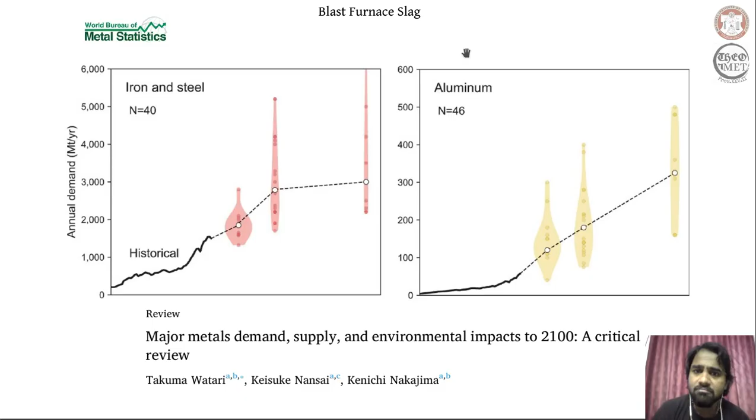So how useful should it have to be for it to be sold for a price? What potential should this blast furnace slag hold for it to be sold in the market? And that is exactly what we are going to discuss not only in this session but also in the sessions to come.

Now, one rather cult-like example that we can give for steel is that in one discussion, Elon Musk talks about why he chooses to use a form of steel, that is stainless steel, in his rockets. Often when we talk about aerospace applications, our mind directly goes to lightweight materials. We talk in terms of aluminum alloys, and if you want a more engineered form of a material, we talk about composites. But here you can see Elon Musk in this interview discusses why he uses stainless steel.

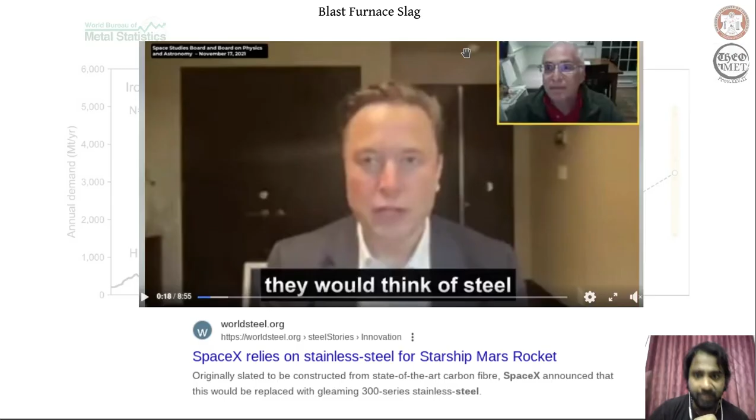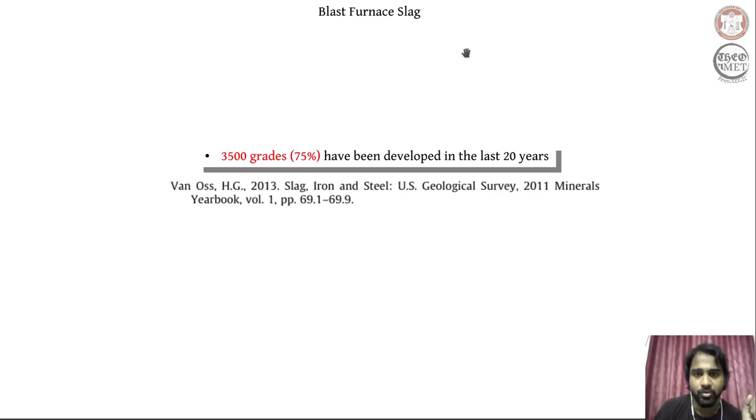So it means that in applications which are often associated with lightweight materials, the use of steel is also prevalent, and that is something that we will see in the days to come. And for that reason and similar other reasons, in the last 20 years there have been 3500 grades of steel that have been developed, and that means that we have identified specific applications wherein these steels can be put to use.

And that is the reason primarily why, because of these generations of steels, because of these productions of steel and the associated production of its waste, the slag, several associations have been constituted in order to manage the slag that is produced along with the manufacturing of steels.

So in the days to come and also in the days behind us, we have been using a significant amount of steel. We are engineering significant grades of steels, so they have contributed enormously to the amount of slag that has been generated.

So in order to manage them efficiently, several associations have been formed. So you have, of course, the US Association, Euro Association, and Australian associations, and soon hopefully we will also have an association of our own. Possibly you guys can come up with one. So all these are constituted primarily to manage this slag.

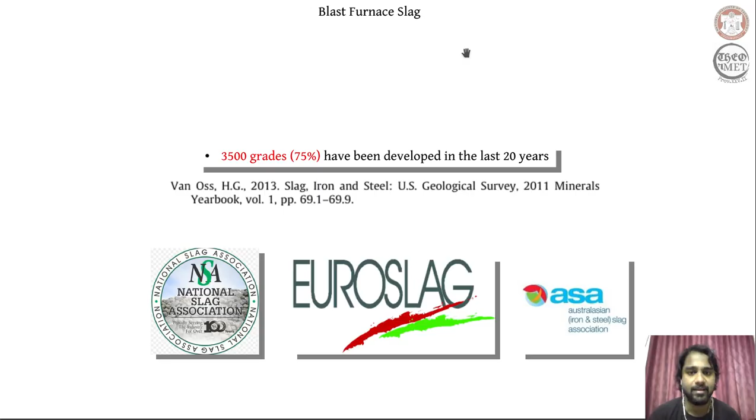Just a quick review of how this slag is produced. So this is primarily a waste that is generated during the extraction of iron. Now iron is available on the surface of the earth in the form of a mineral, and this mineral is nothing but a compound. So if I want to extract iron out of this compound, I have to break this compound down and I have to separate the impurities from the iron.

Now in order to reduce, both technically and also in a colloquial way, this mineral, this compound, into iron, I use an agent in the form of coke, and this coke ensures that my mineral, which is a compound, gets reduced into iron that is desirable to us. Once this impurity is separated, we want to separate out this impurity from the iron that we get at the end of the blast furnace operation.

Now for that purpose we use flux. So the coke that we use separates the impurity from the iron. Of course I don't want to get into the specifics of it, this is not the appropriate place for it, but I want to give you an overview. So I have my ore of iron in the form of a compound. I want to separate the impurities from the iron, so I use coke and I use flux in order to ensure that these separated impurities form a consolidated slag that can be separated out.

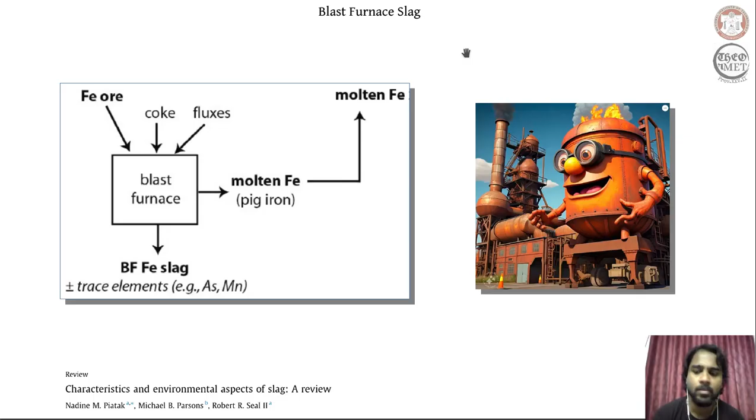So these components essentially constitute the slag; depending on the ore from which we extract our iron, the composition may vary, but these are the primary components of our slag. And understanding the chemical composition of the slag is the first step to ascertain how we are going to manage our waste products. So now we have an overview of the composition of the slag that we are going to manage.

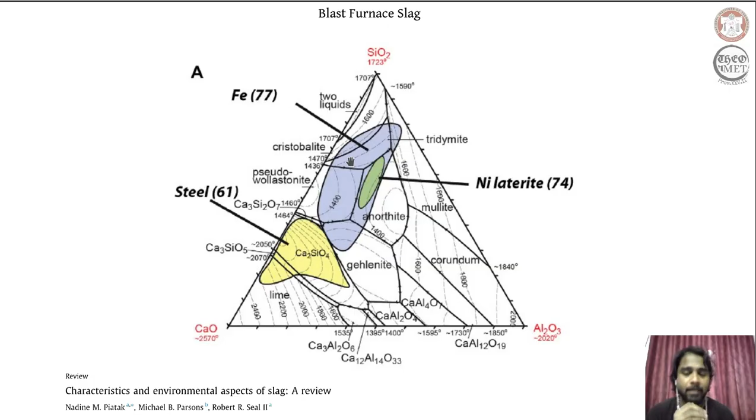Now, this particular paper here is often cited as a source for stating that the slag generated from a blast furnace operation is a non-hazardous waste. So of course there are two reasons why it is referred to as non-hazardous waste. You have a technically rigorous work reported in this article, based on which it is often stated that the slag, the byproduct that comes out of the blast furnace operation, is non-hazardous.

And one other reason is, if you consider the clay that we can find essentially on the surface of the earth, it is nothing but an alumino-silicate mineral. The clay in itself is an alumino-silicate mineral, meaning the sand that we see, that we walk on, has a composition similar to that of our slag. So based on these, it is claimed, to a certain degree of accuracy, that the iron slag is a non-hazardous waste.

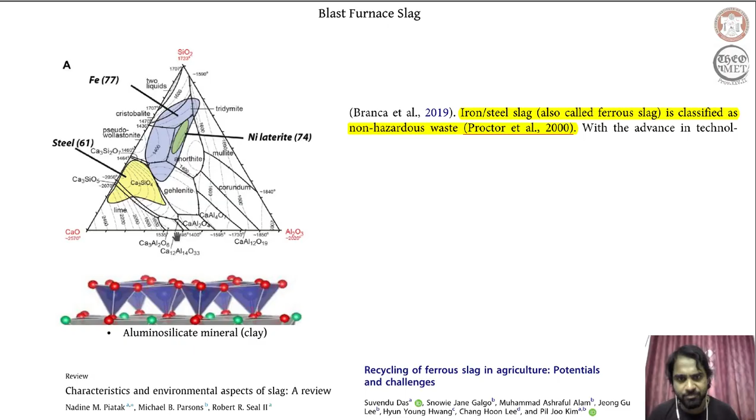The reason we have to point this out is primarily because had they been a completely non-hazardous waste, we wouldn't have to consider how to manage them. If they are non-hazardous, they are not going to harm the environment or us. We don't have to exclusively study their management techniques. All we have to do is just scatter them around the surface of the earth. But unfortunately, only some of these wastes generated in some of these plants, because of the nature of the mineral they are handling, are non-hazardous. And there are hazardous forms of slags that get generated during the blast furnace operation.

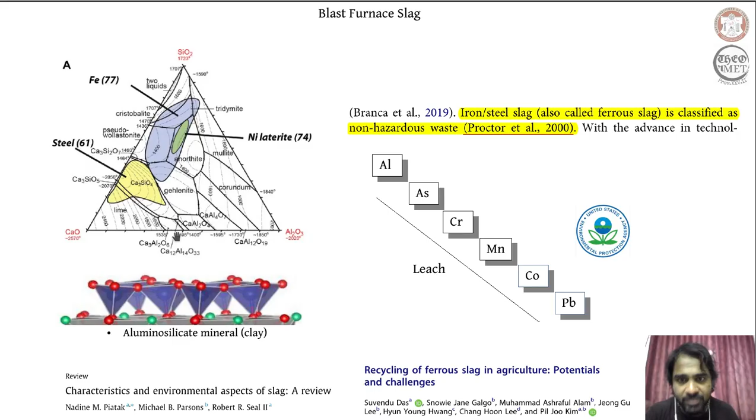The hazardous nature of these blast furnace slags essentially comes from the possibility of heavy metal ions getting leached out of these slags. So what we mean by that is, if I take this understanding of our slag being non-hazardous and keep scattering it on the surface of the earth, it is possible that during some season, the heavy metal ions, when exposed to atmospheric conditions, can get leached from the slag and get mixed up with water bodies, ultimately contaminating the water that surrounds us. So this is something we need to avoid and somehow prevent, and this can only be prevented if we properly manage our blast furnace slag. And for this reason alone, we cannot categorize all blast furnace slag as non-hazardous waste.

We have to look for the possibility of leaching these heavy metal ions. As you can see, some of these heavy metal ions are harmful to us and also to the environment, the plant and animal ecosystem that surrounds us. Some of these elements might not be so harmful at trace levels, but if their amount increases, they are ultimately going to be harmful to us. So before we decide how to manage the blast furnace slag, we need to determine how much potential there is for these heavy metal ions to get leached and dispersed into the environment.

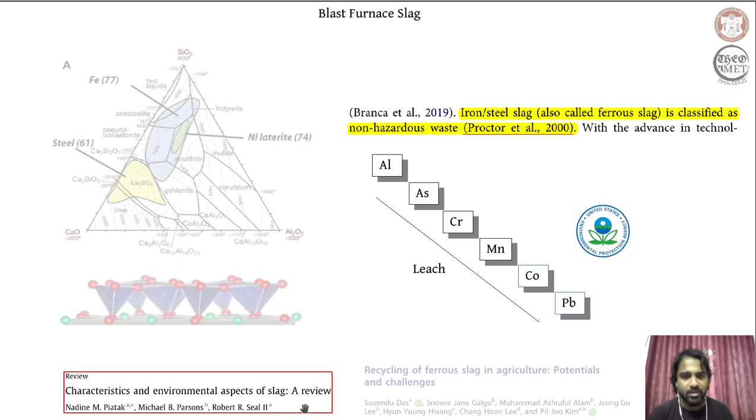So there is this wonderful work being highlighted here. If you are interested in understanding how we can measure the possibility of heavy metal ions getting leached from blast furnace slag, I encourage you to look into this paper. They talk about different ways you can study your blast furnace slag, and you can come to an understanding of whether the blast furnace slag you are considering, maybe from your own or a neighboring blast furnace operation, has a potential of leaching or not. You can get an understanding of the test measures that need to be undertaken. All that information is available in this manuscript.

It's just a shout out to them. In this manuscript, you will see all the nitty-gritty descriptions of what experiments to perform in order to understand if the slag I'm operating with has the potential of leaching these heavy metal ions or letting them out into the environment.

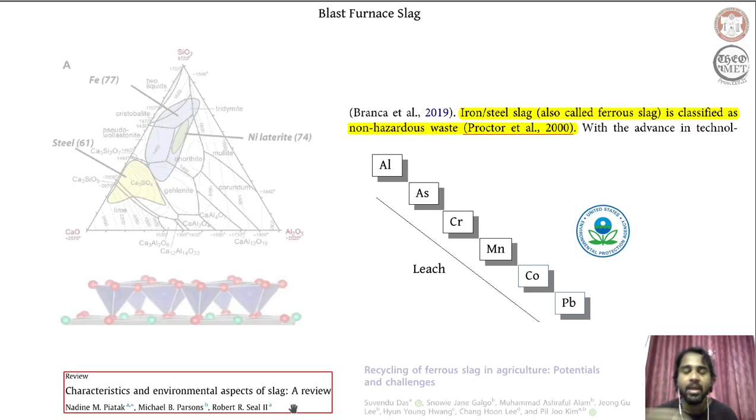Now, apart from the chemical composition and the potential of leaching these heavy metal ions, when we consider the wastes generated from metallurgical operations, we generally categorize them in an approximate way.

We categorize them into acid forming, acid neutralizing, and neutral ones. So what we essentially have in this case is something called acid forming, something called non-acid forming, and at the other end of the spectrum we have acid neutralizing. So blast furnace slags are in general acid neutralizing agents. Acid forming is when exposed to the environment they tend to form acid, and acid neutralizing is they tend to rather neutralize this particular operation of acid forming.

Because of their chemical composition, because they have a significant amount of calcium carbonate and calcium oxide, through these reactions they are able to counteract the acid formation. So meaning, if you have a lower pH using blast furnace slag alone, you will be able to bring up the amount of pH in the system wherein you are using your blast furnace slag.

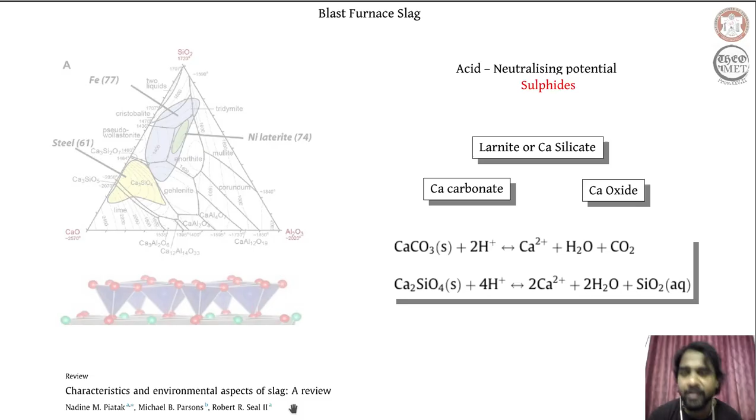Now, of course, some amount of sulfides might be present in your blast furnace slag. Sulfide is a well-known acid forming agent, but fortunately for us, this amount of sulfide is present in trace amounts. So the acid neutralizing potential of the blast furnace slag is able to overcome the amount of sulfide present in the system. Therefore, the entire blast furnace slag is acid neutralizing in nature.

So essentially we have a blast furnace slag that has three primary components: silica, calcium oxide and alumina, and it might have the potential for releasing heavy metal ions under certain conditions. We have test methods to ascertain them, and generally our blast furnace slag is acid neutralizing in nature. So this essentially talks about the chemical nature of the blast furnace slag which we want to manage. The entire series of these sessions is to manage the blast furnace slag.

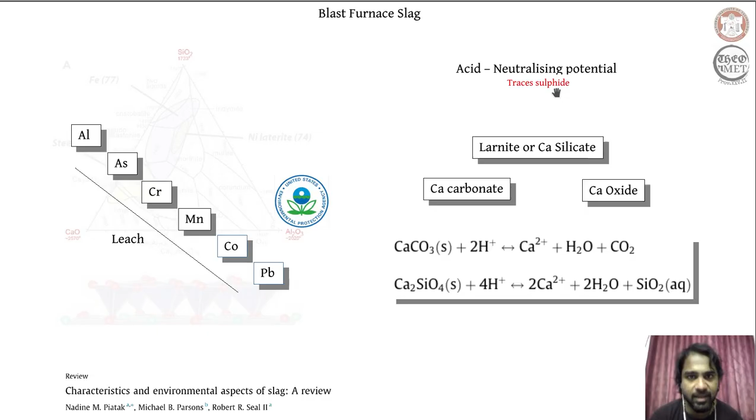Now, apart from the chemical nature, we want to also understand the physical nature, the mechanical nature of the blast furnace slag if we want to manage them. If you want to efficiently manage them, we want to put them into good use. So if you want to do that, we also want to understand the mechanical nature of the blast furnace slag. The mechanical nature of the blast furnace slag essentially depends on the way we cool them.

During the blast furnace operation, when the iron is getting extracted, we receive the slag in the molten state. So depending on how we cool this molten blast furnace slag, the arrangement of the molecules that constitute the slag varies. Correspondingly, the mechanical behavior of the blast furnace slag varies. So depending on how we cool them, we have different forms of blast furnace slag, and that is the reason why when we sell them we specifically state that the slag is a granulated slag. It means the slag is cooled by spraying water on them.

So we have different ways of cooling them. Depending on which way you adopt, you're going to have a different crystal structure, and that is going to give us different properties. And depending on the different mechanical properties, you essentially will have different applications, different areas wherein these blast furnace slags can be employed.

Now, to start with, or let's do one thing. Given that this is going to be a series of sessions, we will break it down into sessions of less than 20 minutes to make these contents more palatable. So for this session, we will wind up here, and in the next session, we will begin where we left off.

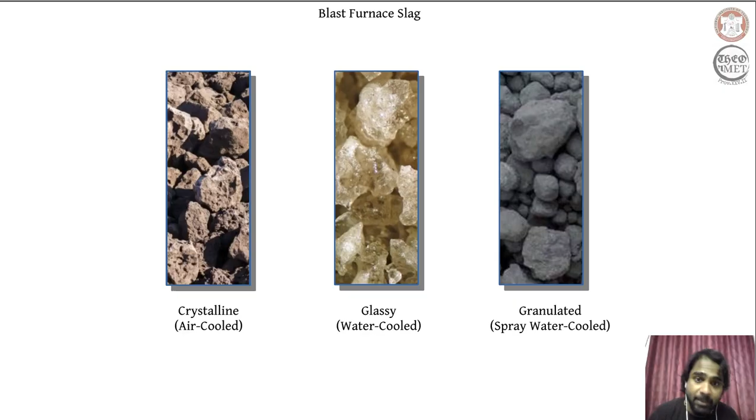Essentially, we will talk about, when we have these chemical compositions and these forms of blast furnace slag, where can we use them? What is the best way to manage them? So far we have understood the chemical nature, the mechanical features through its atomic arrangements, of the blast furnace slag and where it comes from. In the next session, which we will start in a minute, we will talk about where the blast furnace slag, given its chemical composition and mechanical properties, can be profitably employed and efficiently managed.